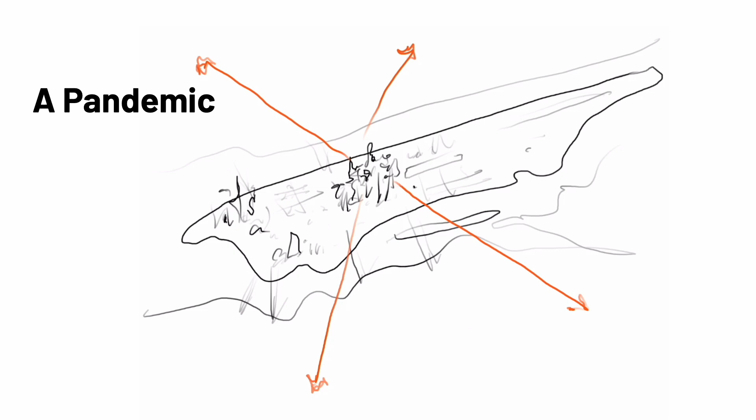When we think of resilient cities, we think of cities that can adapt to our changing needs. We know that the pandemic emptied many office buildings, but we don't often talk about the early 1980s U.S. tax code revisions that resulted in the overproduction of commercial real estate. This overproduction is set against a dramatic underproduction of housing, causing a housing shortage of nearly 4 million units, making housing unaffordable and acutely impacting communities of color and low and middle income households. These same households are those most affected by climate change.

With only 7 years left to avoid disaster, we must focus on limiting upfront carbon. The easiest way to avoid carbon is to not build. Adapting our existing buildings rather than demolishing them makes sense. So how do we legislate for adaptive reuse?

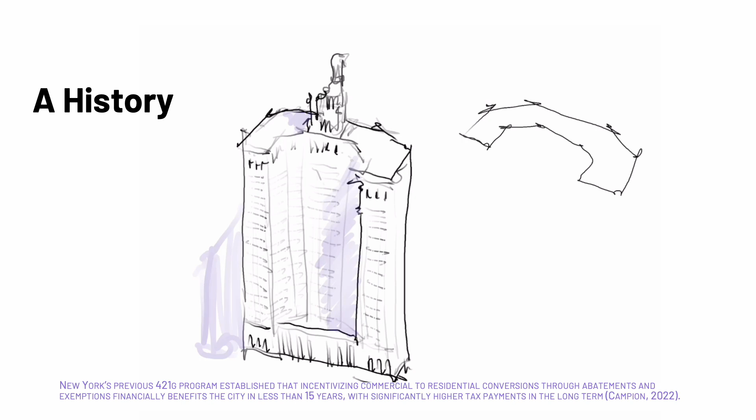First, we rezone to build more equitable cities, including targets for affordable and supportive housing integration. We'll come back to this idea a bit later on. Second, we incentivize. New York City's previous tax abatement program, known as 421G, incentivized conversions, financially benefiting the city in less than 15 years. The buildings converted during 421G, much like the one shown on the screen here, relied on daylighting, natural ventilation, and were fairly straightforward in their adaptation.

The post-war period led to larger and larger floor plates for commercial buildings. No longer relying on daylight and focused on the idea that personal interactions increase success, businesses wanted large spaces on single floors that could facilitate connections between employees. Because the New York City Building Code requires living spaces to be within 30 feet, roughly 10 meters, of windows, these large floor plates present new challenges.

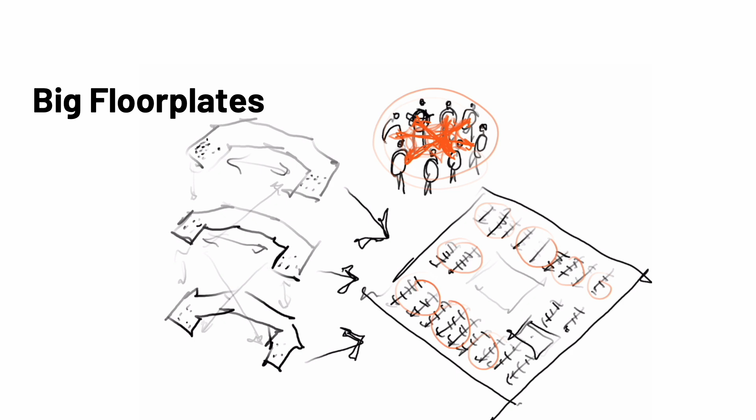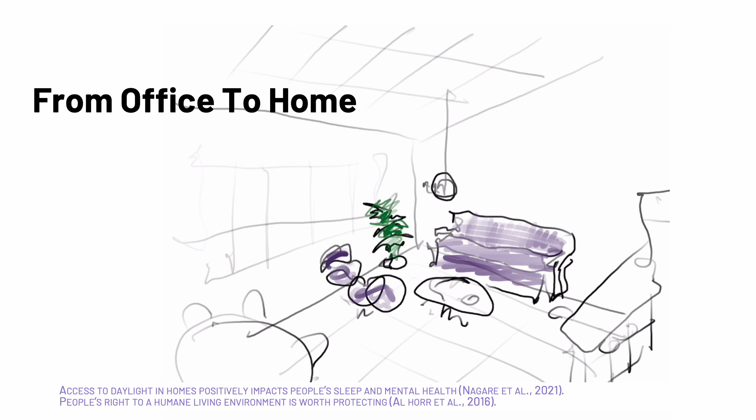Now, as we consider this transitioning of office space to living spaces, to make these deep floor plate conversions easier, there's a push to relax building code requirements. As a team, we agree that current housing protections are valuable and should not be eroded. We know that access to daylight in homes positively impacts people's sleep and mental health, and we believe that people's right to a humane living environment is worth protecting.

We know that the kind of complex problems that generate more questions require truly cross-disciplinary consortiums to develop innovative responses, but we rarely have the opportunity to establish these types of teams. This project harnesses the creative capital of 14 upper-level architecture students working together with developers, architects, and cost estimators. Empowering these students to address equity in urban development positions them to understand the social impacts of business decision-making, supplementing the students' technical education with practical, complex problem-solving skills.

We started this project focused on experimentation, creating glycerin models of formal interventions, and then we continued, breaking into 3 research teams: income integration, building form adjustments, and the history of apartment floor plans. Each team diagrammed and cataloged their work, creating a taxonomy of responses: equitable, formal, and spatial. We affectionately called this work the equity mix.

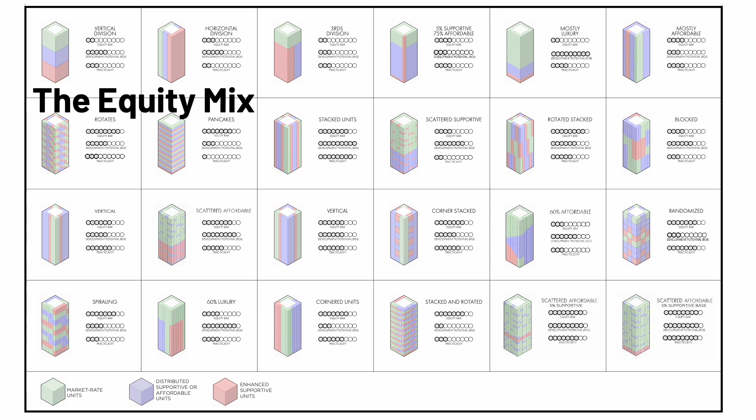This is the piece about building equitable cities through rezoning we promised to return to earlier. Here, we looked at how to integrate affordable, supportive, and market-rate housing. Supportive housing provides on-site social services for those in need, often those transitioning from homelessness or out of the foster care system, and enhanced supportive housing allows for daily care associated with higher needs, such as mental illness or aging. While many of the iterations shown here were not practical, they served as background for discourse and led to a solution: a randomized integration of affordable and dispersed supportive housing on a base of 5% enhanced supportive.

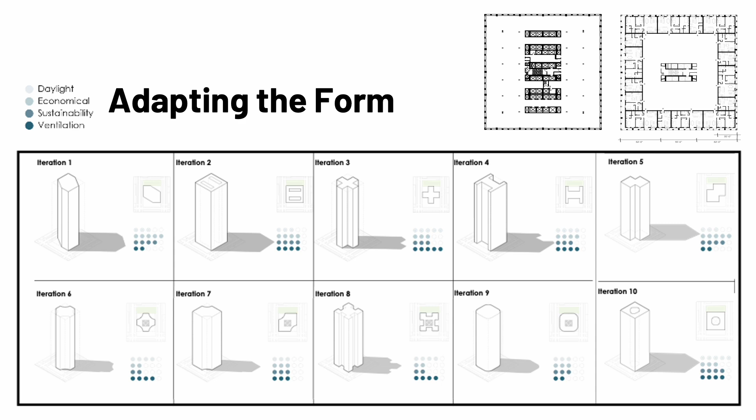An initial test fit clearly demonstrates the ill-suitability of very deep floor plates for traditional apartments. You can see this floor plan illustrated here in the top right-hand corner. In order to address this mismatch, the project explored formal adaptations to allow for more access to daylight. The third and final in the series of tabulations studies individual apartment plans to understand allowances for better quality housing.

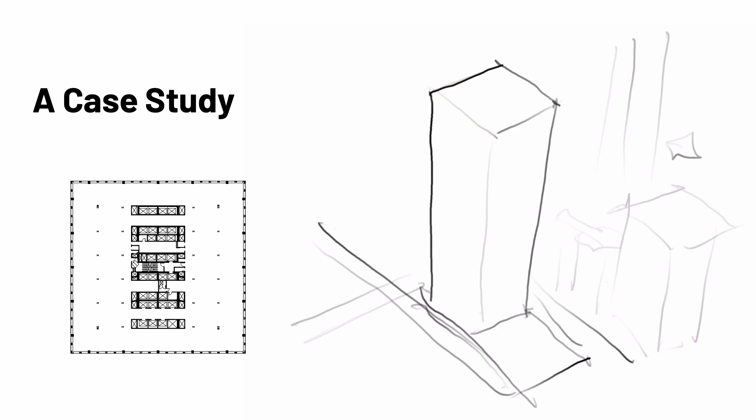A 1972 large floor plate office building, we used 1166 6th Avenue as our prototype. Building on the knowledge developed during the taxonomic studies, 42 conceptual prototypes were proposed, workshopped, and categorized into 4 themes.

Vertical channeling of the existing building to articulate the floor plate allows for daylit apartments along double-loaded corridors. This strategy references the pre-war building forms of 421G.

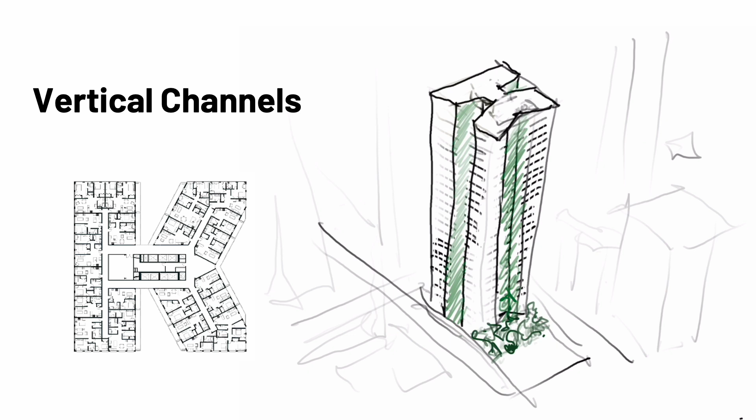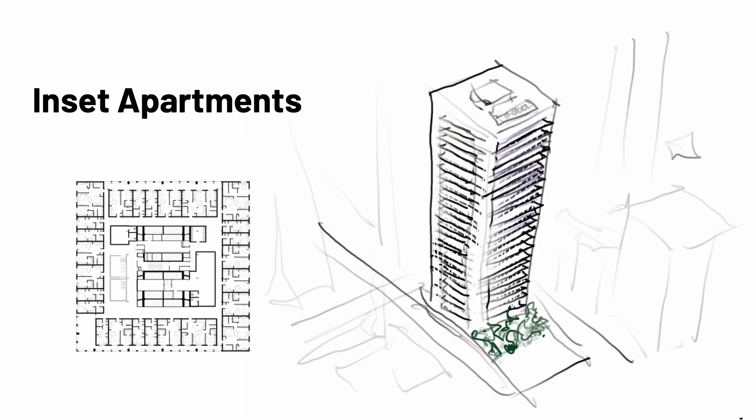Inset apartments allows a deeper utilization of the floor plate, providing balconies for most apartments. Current trends in New York City real estate make balcony area desirable and therefore saleable. Remaining interior building space is utilized to create spaces that engender community, a desirable amenity post-COVID.

Hollow Core provides a plan that refers to the historic traditions of classic New York City apartment buildings like the Dakota and the Apthorpe. Because a courtyard form is only effective to a maximum height while allowing daylit apartments, this proposal suggests maintaining a commercial base.

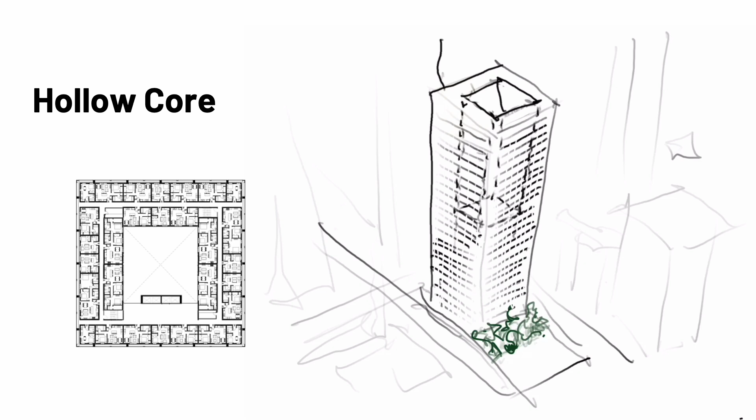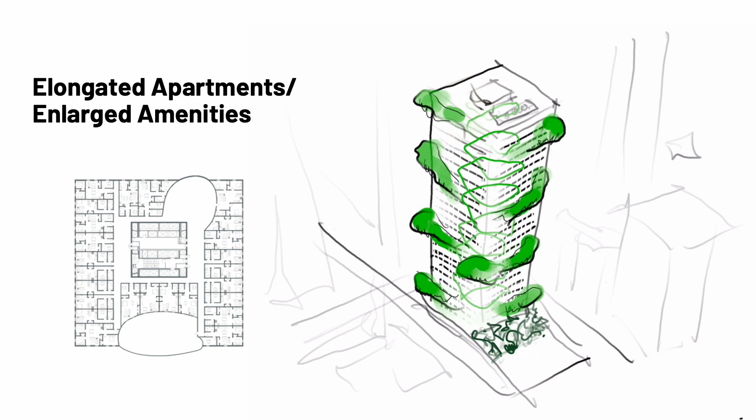Elongated apartments enlarged amenities deepens the traditional apartment plan by adding a mechanically ventilated interior home office, extending the usability of the floor plate toward the core. Additionally, large organically formed amenity spaces connect the floors, allowing for more inter-building connectivity while providing social congregation spaces.

This group established that in New York City, where each square foot is precious, having the benefit of extra area, even if removed from daylight, offers opportunities to shape both new forms of apartments and new forms of buildings, with spaces focused on outdoor living and counteracting post-COVID isolation by generating connections.

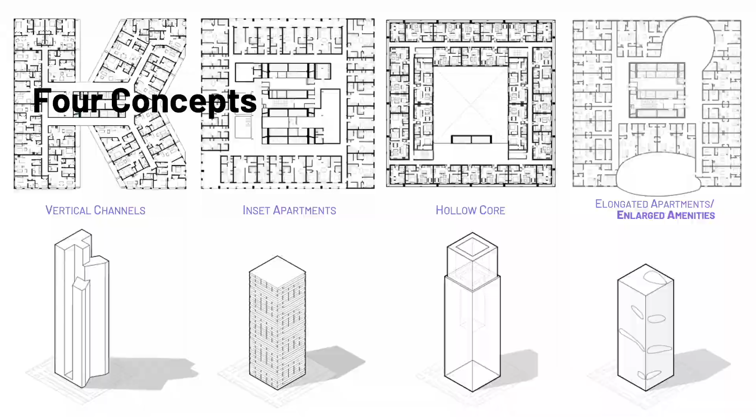The project's affordable and supportive housing developer RiseBoro's vision for urban futures expresses beautifully what we strive for: to build a city where your zip code does not determine your health outcomes, housing stability, or economic power. The future resilient city needs a holistic approach taking into account social, economic, and environmental sustainability.

To build this future city, we should rezone to allow for adaptive reuse, and we should incentivize. It's essential that along with rezoning, we legislate for positive change, mandating mixed-income integration and daylighting requirements for new construction, ensuring future buildings can be responsive to the city's evolving needs.